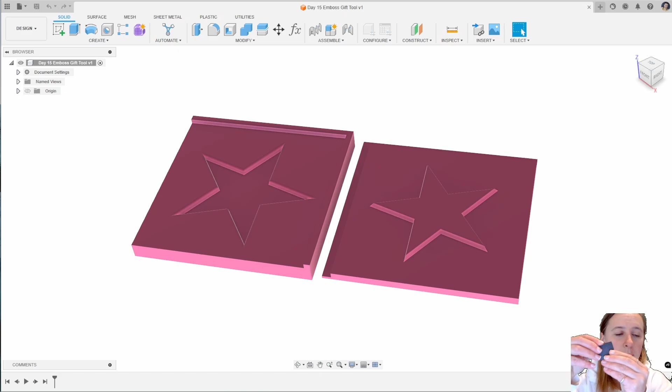For today, day 15, we are designing an emboss gift tool. You can 3D print this little tool and then pop a piece of card between it to emboss or deboss a festive decoration. I'm going to do it for a star, but you can design it for whatever festive item you want, using some of the designs we've already used in CADvent, maybe a Christmas tree, or you could write a little note.

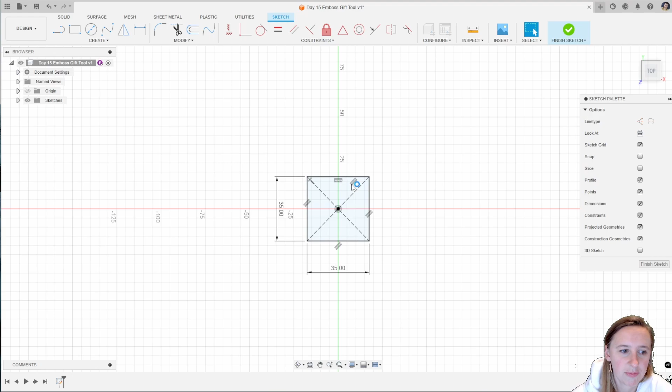To get started, I'm going to create a sketch and use a rectangle. Using my center rectangle, I'll do a 35 by 35 mil square. I'm going to finish that sketch and extrude it by 3 millimeters.

I'm then going to create a sketch on that top surface and use the offset tool, so modify and offset. I'll do an internal offset of -1.2, which is 3 times my extrusion width for 3D printing. If you've got a different extrusion width, you can set up a different offset.

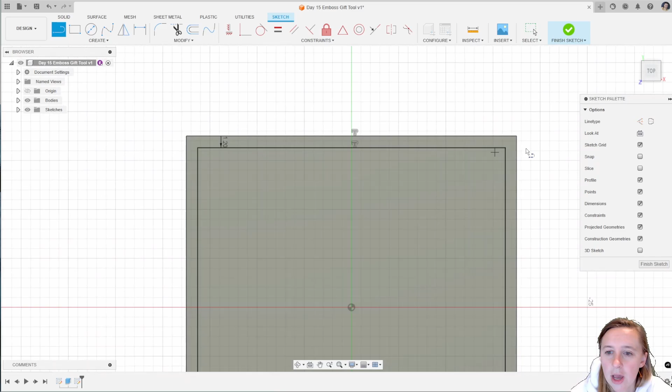I'm then going to create a line into the end with those two pieces there, and this here is going to be my new square center that I want to work on. So don't necessarily use the origin of your part because you're going to have this little offset around the edge.

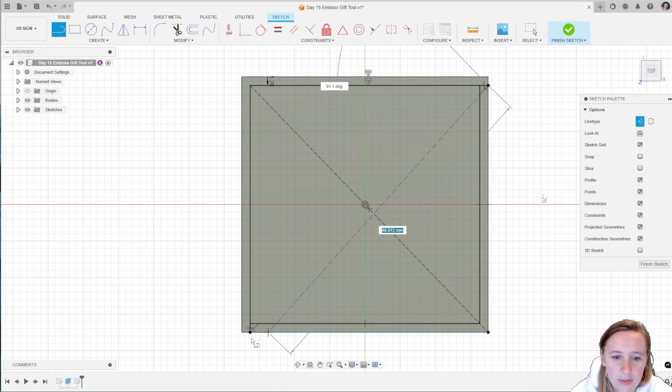Now, if you wanted to create a center point to center your design around, you can use a construction line. So line, and then X on the keyboard is the shortcut. Bring that from this corner down to this corner, and this corner down to this corner. Then you can create a point at the center of those, and that there is your new center point origin of your design. So I'm going to do a very simple star.

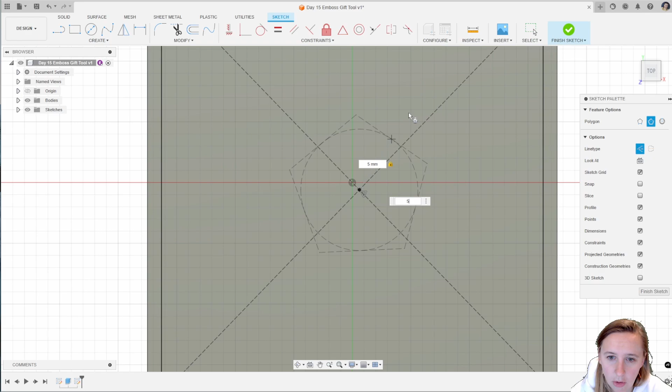I'm going to use a polygon with that new design. Make sure I've got 5 sides there, and I'll keep it on an offset, keeping those as construction lines. The diameter you can just drag out to a size that kind of works for the design, so maybe 10 mil, that kind of looks okay.

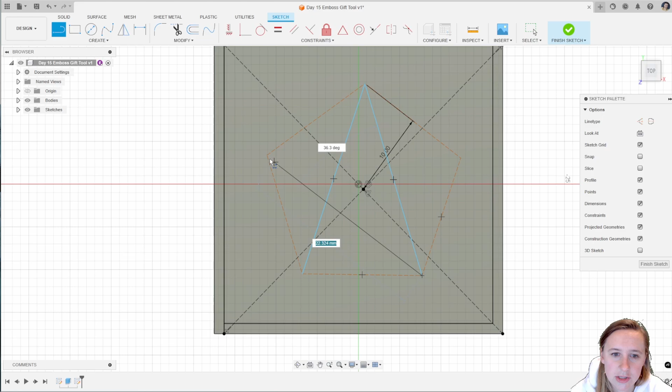I'm then going to add in some lines. I want to turn off my construction here and go from point to point just to create a very simple star for my design. I might just delete that dimension, and then you can drag that out to a size that you are happy with.

I'm going to add in a horizontal and vertical constraint just to make sure my star is centered around that point. Once you've got your design that you're happy with, click Finish Sketch.

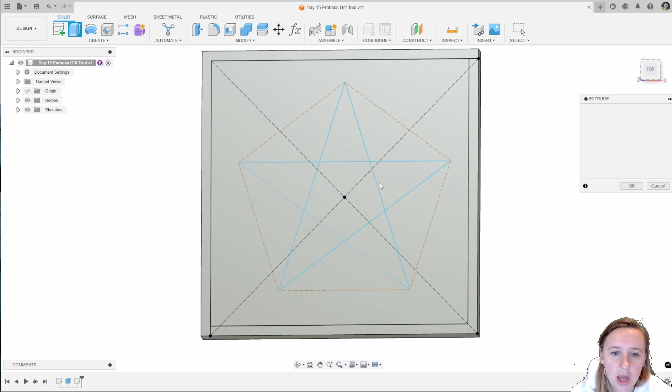Then you're going to do an extrude of the shape you've created, and you want to do a -1 extrude, but add a taper angle of 15 degrees, it might be -15. This just adds a little bit of a draft angle into the part for the shape you are designing. So there we go, that's the basic shape of my design.

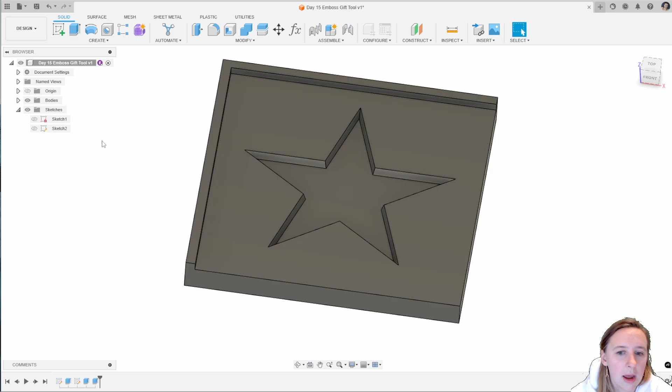I'm then going to do a second extrude, just showing my sketch of that outer profile, and that's going to be 1 millimeter. This is my point that will let me line up the design, and that there is the base piece of my object.

I'm now going to create another extrude from the original sketch that I had. So just hiding the body, and that's going to be 5 or 6 mil, depending on how big you want the top of your part to be. If you do it 5 mil, you'll end up with quite a thin part. If you do it 6 mil, it'll give you a little bit more thickness to work with.

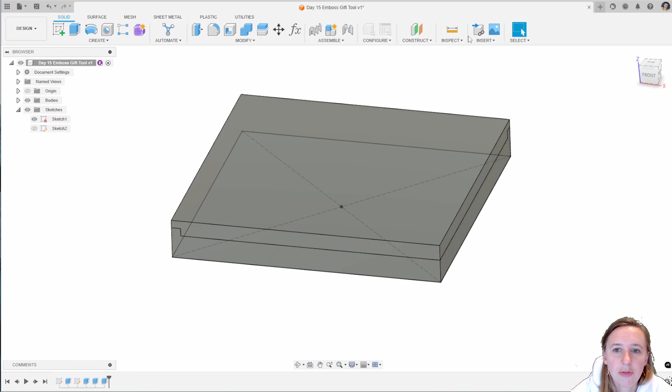So we go, there's that. Now if I create a section analysis, inspect section analysis, and do that on this plane here, pressing and holding the plane there, you'll see that these two objects are fully overlapping with each other. So that one's the bottom one, but then that's just a square.

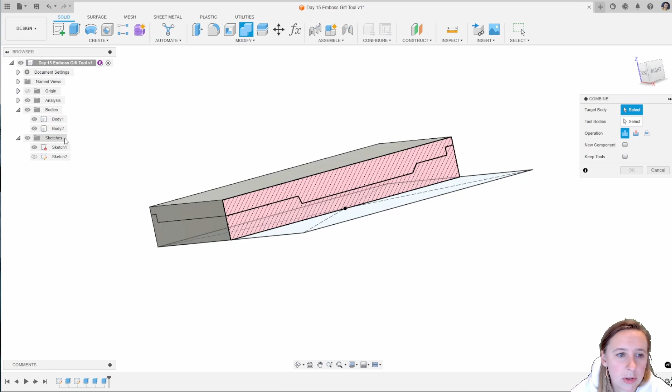I'm going to use a tool here, the modify and combine tool. My target body is that big rectangle I've just created. My tool body is going to be body 1, but I want to keep my tool, and I'm going to use a cut operation. This trick is going to cut out in my second body the design of the first body.

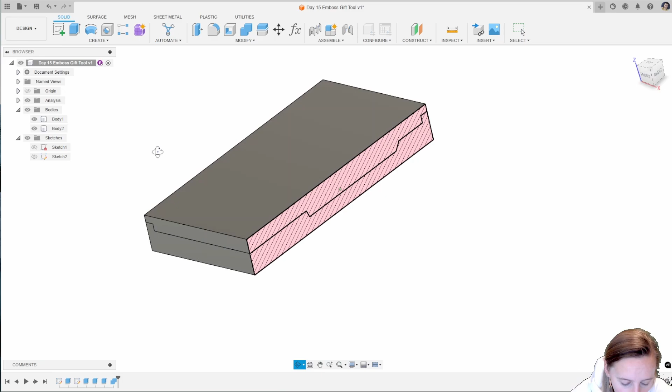So we go, we can see that star shape there. So we're starting to get a bit of a tool there. However, I want to add in a bit of tolerance. If I printed these, it'd be very difficult as is to create the emboss with this.

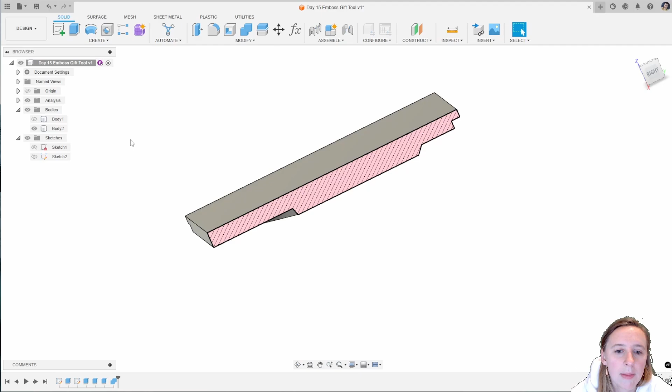So I'm going to create a parameter. Modify, change parameters. I'm going to set up a user parameter called tolerance. This is my manufacturing tolerance, and I'm going to use a manufacturing tolerance of 0.5, but depending on your 3D printer, you may need to use a different tolerance. I'm then going to show body 2, then hide body 1.

On body 2, turning off that section analysis, I'm going to use a press pull. Now press pull can be used for various different operations. It's generally not good practice to use it when you can use a parametrically defined thing like an extrusion or a fillet. However, in the case of manufacturing tolerances, it can be really useful.

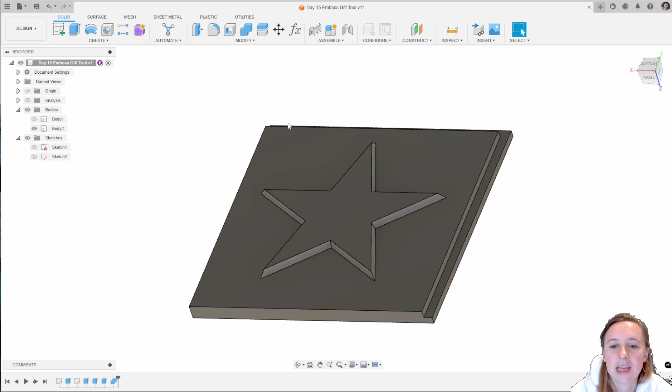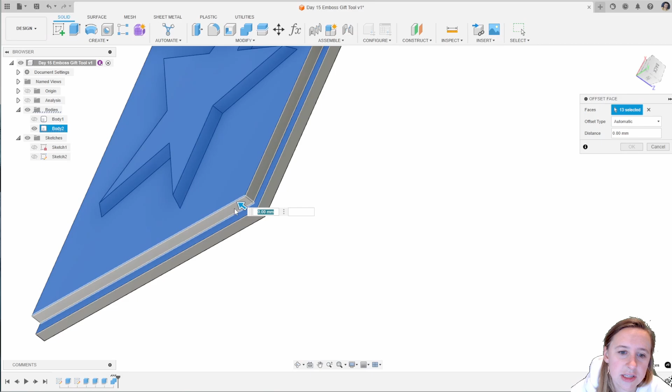So I'm going to create a press pull, and select all of my faces on the top surface of the top piece of the object. Just spinning round and making sure I've got all of those faces that I want to create the tolerance of. So it's those ones, but it's also going to be this surface and these two here. Basically everything except the back surface and those two sides.

And my distance is going to be tolerance, so start typing in tolerance. It's actually going to be negative tolerance in this case. Click OK, and if I turn on that section analysis and go back to that view, you can see now we have a tolerance for that object there.

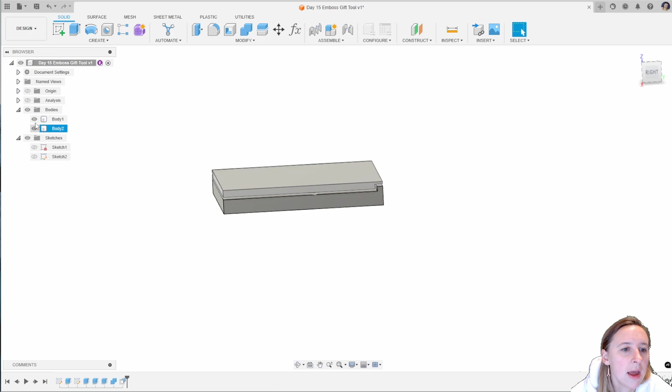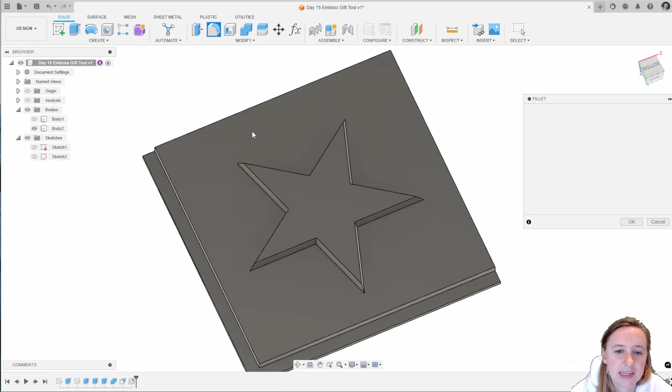I'm going to add in a couple of fillets. On the bottom piece, I'm going to go around and grab all of those edges there. This is just to make sure that the tool is not too sharp and doesn't cut the card or paper. So just adding in a fillet of 0.5 millimeters on the bottom one, and then on the top body I'm going to add in a slightly smaller fillet of 0.2 millimeters, selecting all of those edges there, and then a 0.2 millimeter radius on there.

And that there is a very simple emboss tool that you can 3D print and use to emboss your labels, your Christmas labels on your present gifts. And it's going to end up looking something like this. You pop the paper between it, squeeze it together, and there you go. You've got a very simple emboss tool.